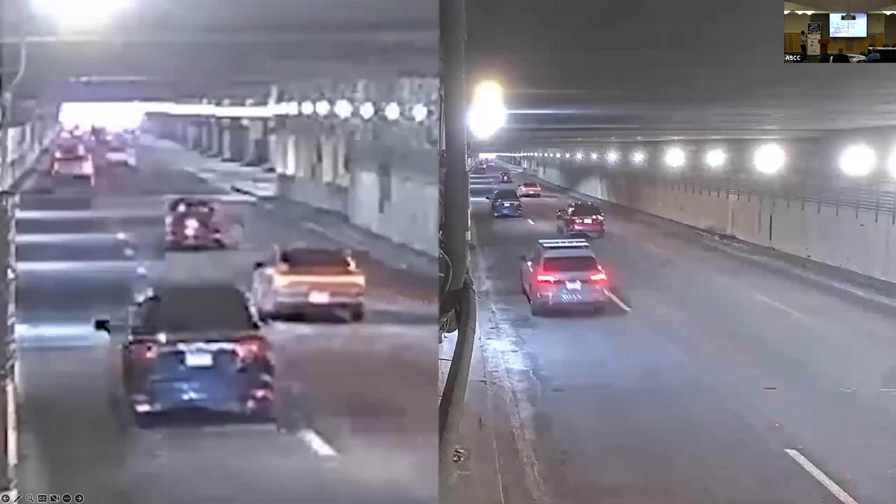I believe that this video is published by MassDOT. Oh, thank you.

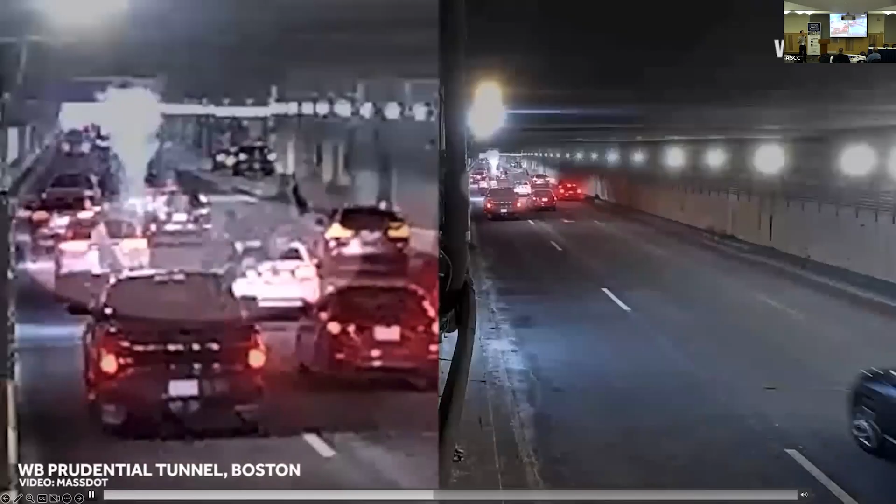So that is the Prudential Tunnel located in Boston. This happened in February this year. I believe that Dr. Jiang Yu knows more about this one. They are still under investigation, but what they are thinking now is freezing and thawing, coupled with the corrosion of reinforcement. The corrosion of the reinforcement triggered these kinds of issues. So it's quite scary, isn't it? Because the corrosion is going to happen coupled with other durability issues, and that could cause these kinds of sudden issues.

So let me first talk about corrosion 101. Corrosion happens everywhere. As long as oxygen and water exist, the steel is going to be corroded. Then chloride comes into play, and that corrosion process is going to be accelerated. That's simple. As a result, steel is going to lose its mass, which means that the cross-sectional area of the rebar is going to keep reducing because of the corrosion.

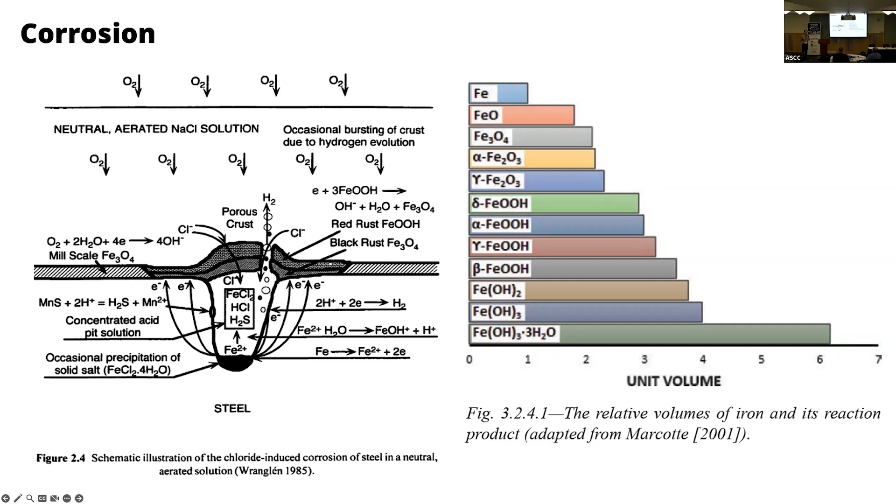On the other hand, the byproduct we call rust. Can you believe that that many different types of rust exist? If those rusts are formed, the volume of those rusts is 2 to 6 times greater than its original iron, which means that the large volume of rust is going to try to push out the concrete, and eventually tensile stress is going to be formed, then cracking is going to happen. As a result, a lot of the cover is going to fall off. However, we never know what's happening inside of the concrete because of the corrosion. So let me show you further.

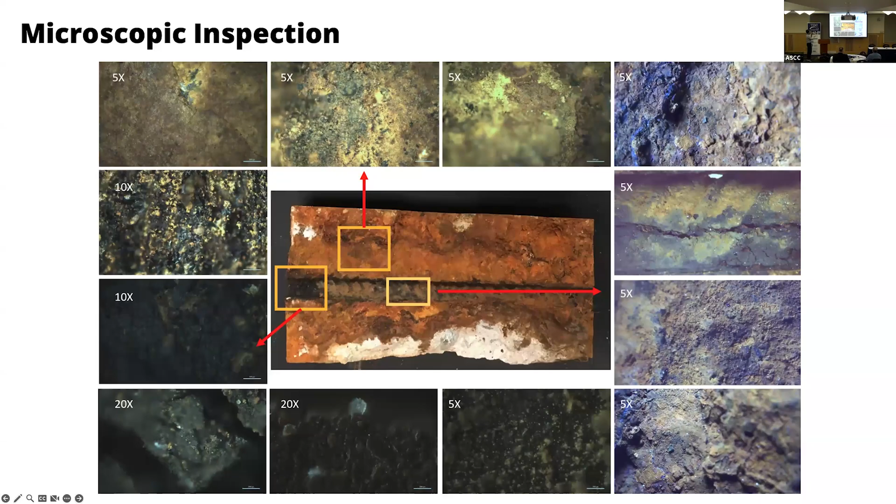I wondered, is it really possible to have those different types of rust? By microscopic inspection, the answer is yes. We could see those different types of rust over there. Another question that I had was, yes, the corrosion is a big problem. Then do we really care about that in the design or the construction stage? So this is what I would like to show you.

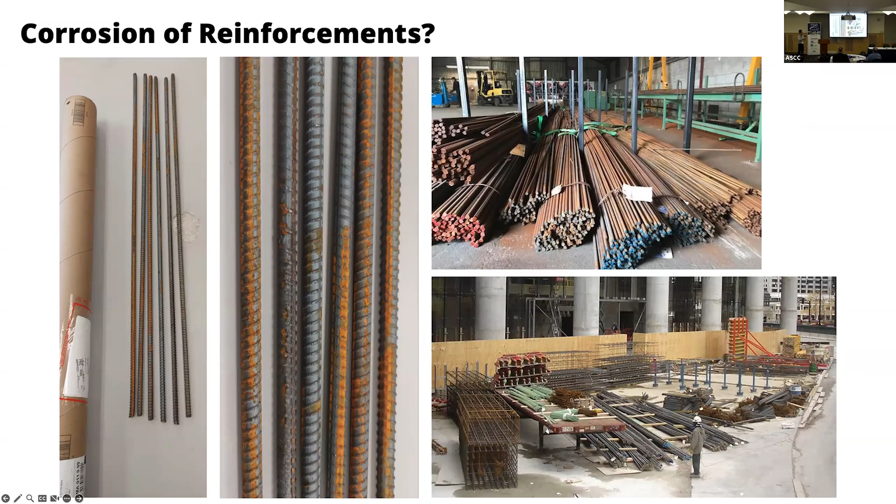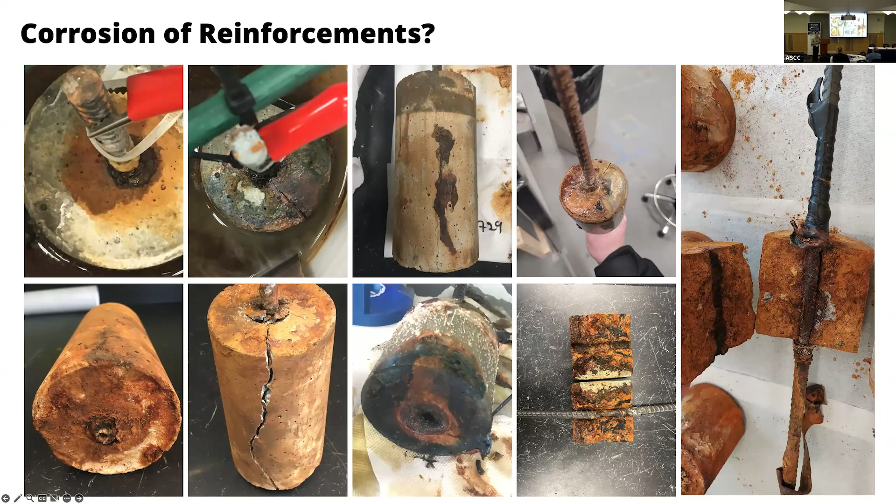So I was quite surprised because of this kind of thing, because we cannot really expect what's happening inside of the concrete because of the corrosion. And also, that's why it's really hard to predict. I'm not even sure that it's possible to monitor how much the corrosion is happening inside of the concrete.

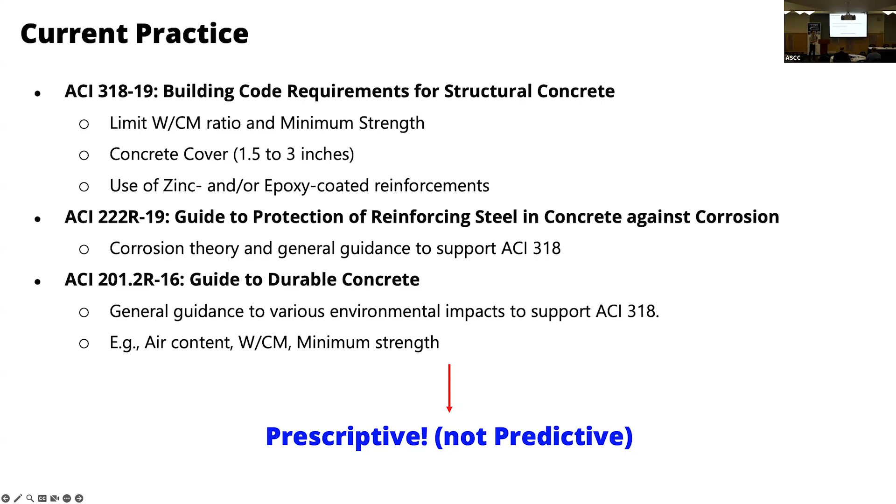So basically, our research question was quite simple. If we can estimate the level of the corrosion, and if we know the type of the material, is it possible to predict the structural performance? In other words, the degradation of the structural performance. That is the question.

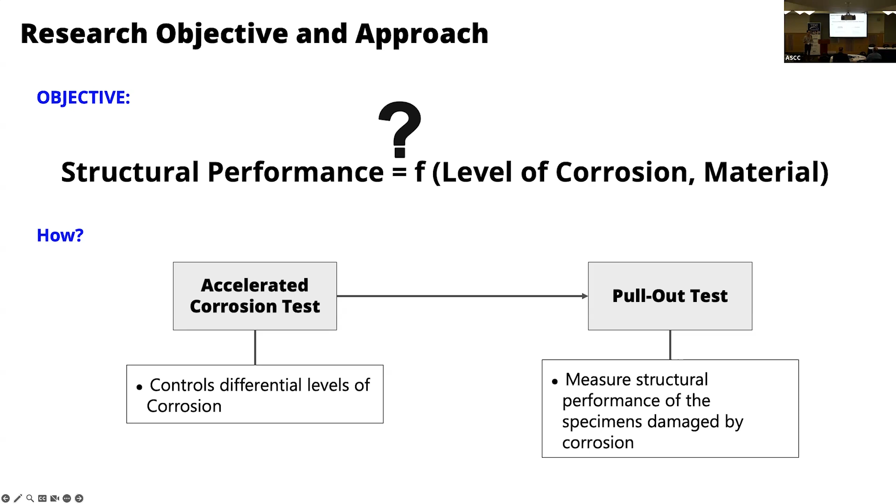Generally the corrosion process takes a few years to decades, more than decades. I cannot wait such a long time. That's why we had to accelerate the corrosion, so the first part is necessary. And then in the second part, we have to check the structural test. Among all different types of structural behavior, we picked the pull-out test, because that is the key mechanism for the structural integrity.

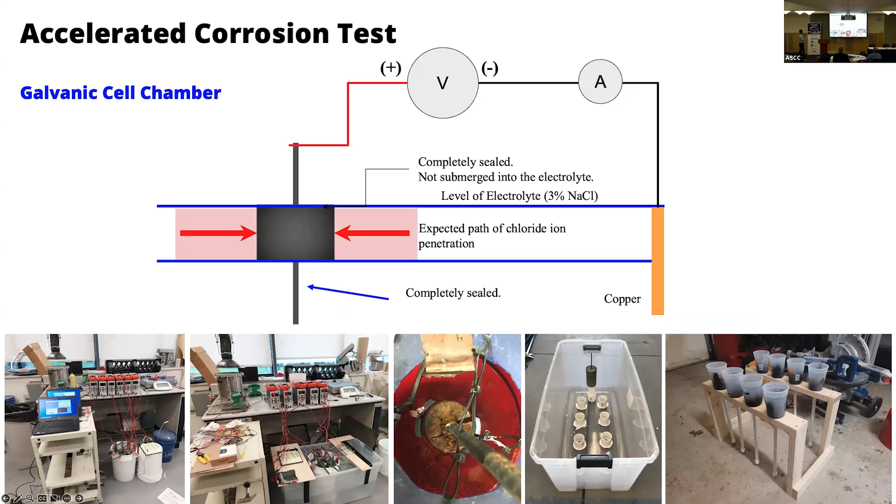So this is the simple principle of the accelerated corrosion test. It's a simple galvanic cell chamber. By using this chamber, we accelerated the corrosion. This is the result that I would like to share with you. What we tracked was the current with respect to time. When the corrosion starts, the current decreases. And then when micro cracks form, the current starts increasing.

So by seeing this history, the graph of the current, we were able to see what kind of thing happens. The current keeps decreasing; at that time, you probably cannot see any crack. And then the current starts going up, and a micro or small crack happens. That crack propagates and becomes wider. Eventually, the current goes to almost infinity. So that is a simple way to track it.

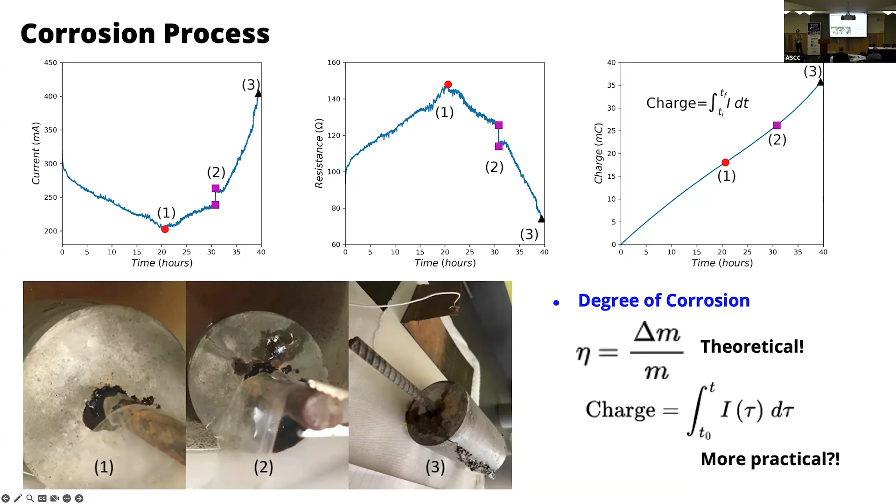Theoretically speaking, to define the degree of corrosion, they use mass loss. However, we cannot really measure the mass loss inside of the concrete. So instead, we track the charge by integrating the current with respect to time, and use it as an indicator for the degree of the corrosion.

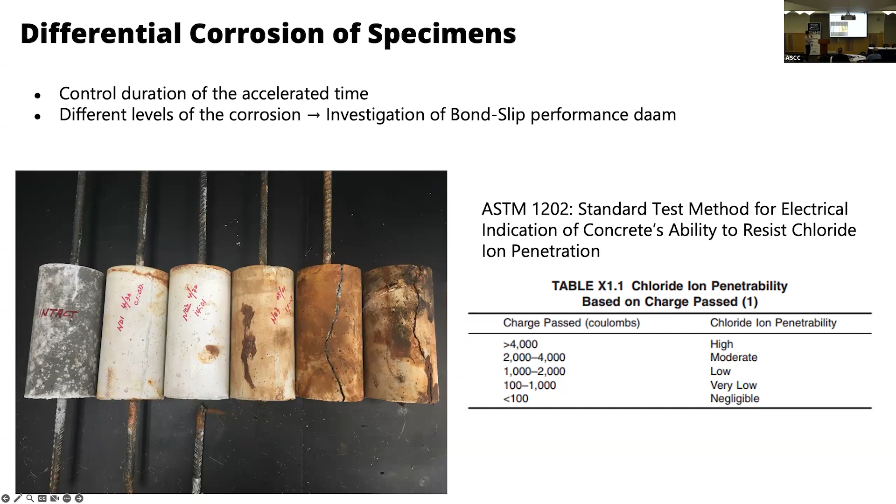So look at the beautifully cooked specimens over here. On the left is an intact specimen. On the right is the most corroded specimen. By changing the level of the accelerated corrosion, we made specimens like this. And then we pulled out the rebar to measure the bond strength. That is the way that we used.

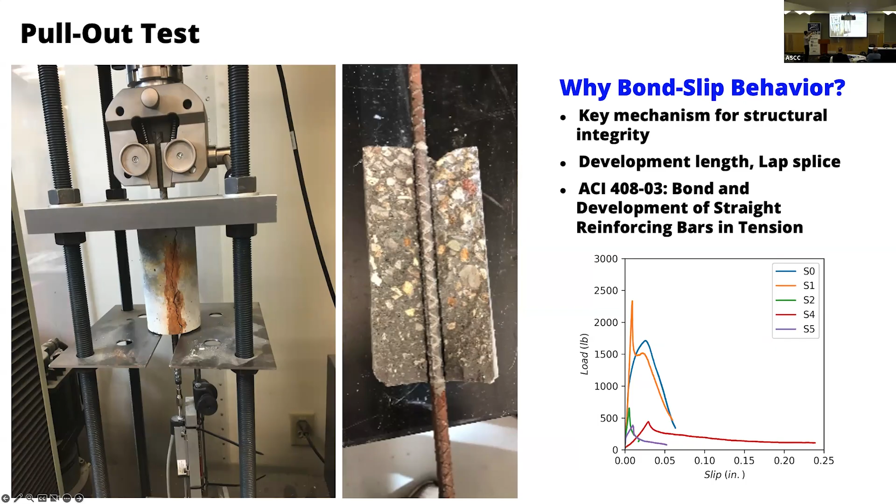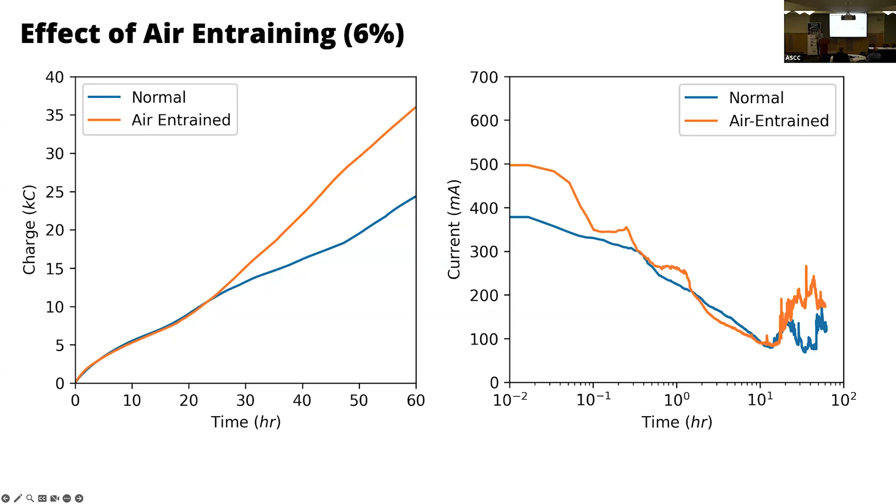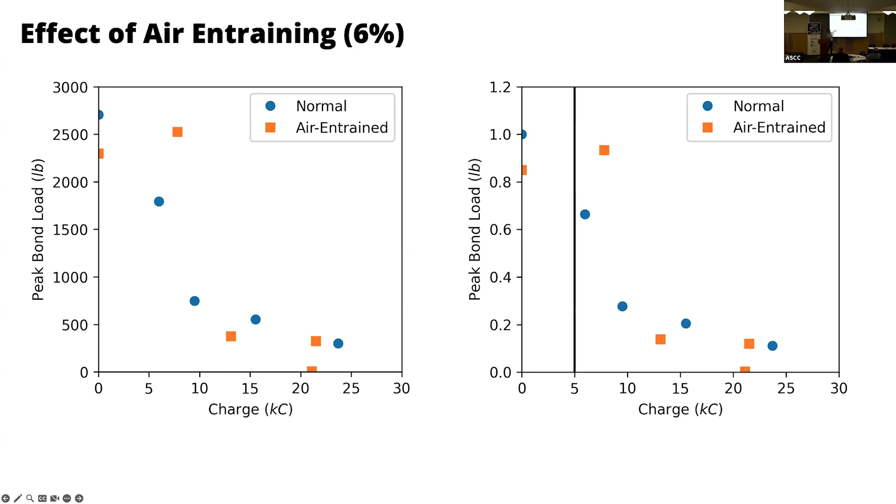Which means that for normal strength concrete, as long as there is no corrosion, the highest bond strength is shown. However, as corrosion progresses, that strength goes down. That is just a reasonable thing. However, air entrained concrete is over here. A little bit of corrosion is sometimes helpful. However, as corrosion progresses further, the strength goes down.

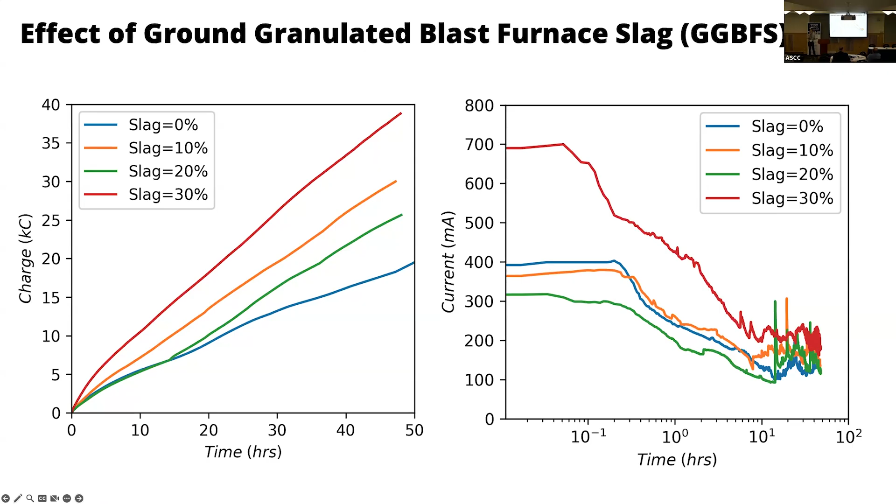Another thing is the slag use. Nowadays, the importance of low carbon concrete is getting higher. So a lot of the industry tries to use slag in the concrete. However, here's a little bit of a problem. The electrical conductivity of slag concrete is higher than the normal one. As a result, the risk of corrosion becomes higher, which means corrosion inside of slag concrete is going to be faster. So that would be a problem.

However, slag itself gives some filler effect. Bond strength is a little bit better than normal concrete. That is a little bit of a controversial issue, so we try to interpret this one a little bit further. But anyways, as corrosion progresses, the amount of slag becomes just meaningless. So next.

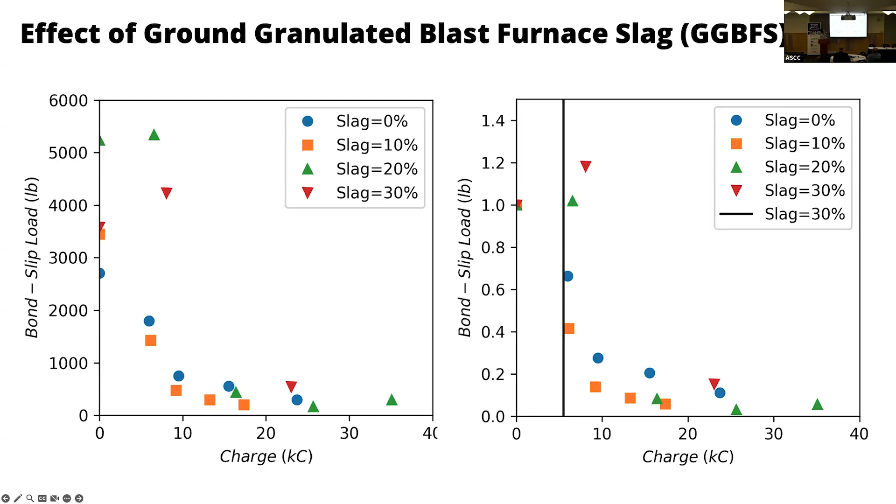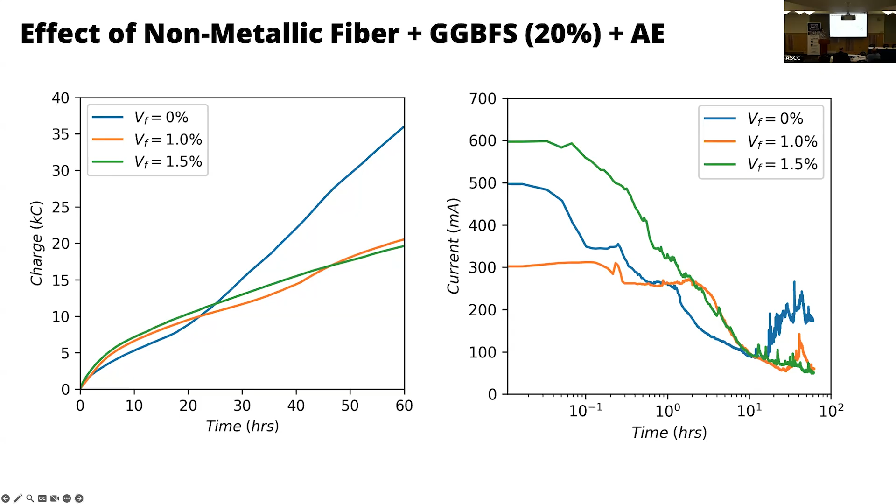So then on top of the slag concrete, we try to use a basalt fiber. So how is it going to be used? Can you see that? The blue response is normal concrete; as long as you use the basalt fiber, the curve is a little bit lower, which means that it's stronger against corrosion. So I believe that the fiber somehow minimizes micro cracks as well, so that slows down the corrosion process. As a result, the bond strength is higher when you use more of the fibers in there.

So what we found are three effects. Air entraining agent: if you use air entrained concrete, it's going to accelerate the corrosion. And if you use slag in the concrete to reduce the carbon footprint, it's going to be good. However, you have to be careful because corrosion is accelerated in slag concrete. I would say that more than 10% slag use is helpful to get the filler effect. And non-metallic fiber, in other words the basalt fiber, really helped to improve the bond strength. Then how much is good? 1% is a pretty optimum range.

So finally I'd like to highlight and appreciate the undergrad students that worked together. I would like to show their design progress. 5 years ago, they started like this, and they built it from scratch. Then they found some heat problem, because corrosion itself is exothermic. So if you believe that you are doing this experiment under 20 degrees Celsius, once corrosion starts happening, the temperature goes up. So to get rid of the temperature effect, we had to make a cooler system. Then eventually the design changed a little bit.

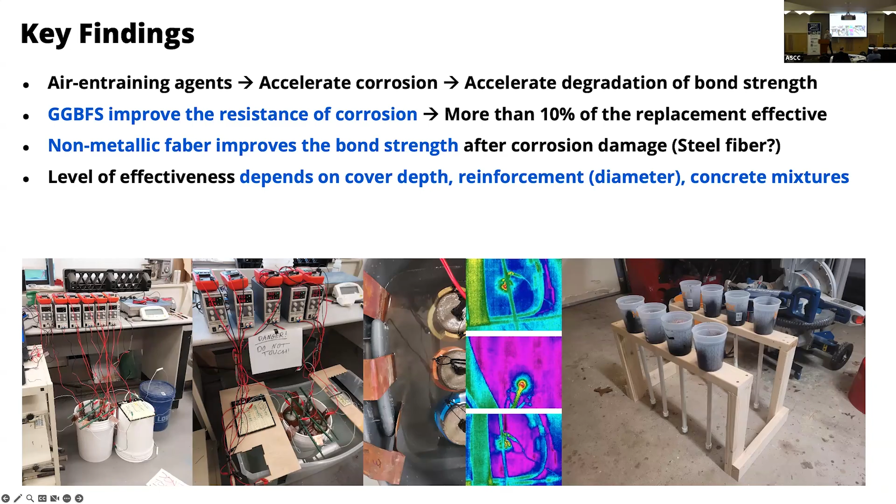So after that, based on the results that we got, we tried to get a model from there. Not just a simple regression model, we tried to use a kinetics model. Why? Because corrosion itself is a chemical reaction, and we are dealing with mechanical property degradation. So to combine those, we tried to use the kinetic model.